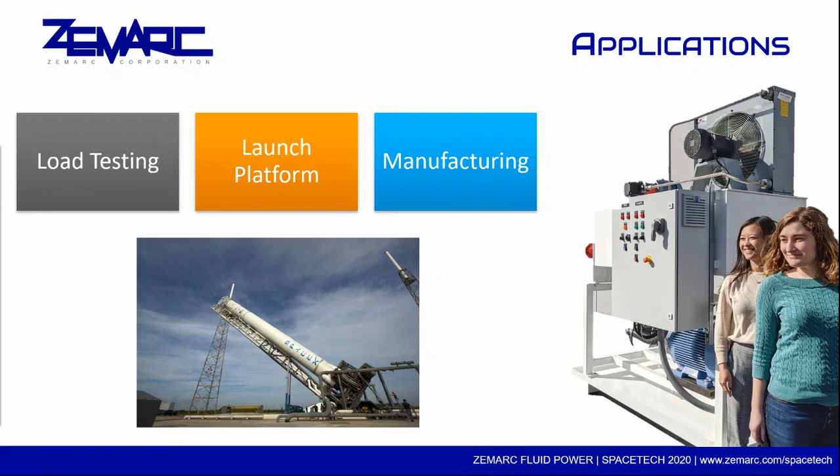Now what I want to do is walk through a list of key considerations that we must address when designing an HPU. HPUs are built based on the requirements of your application, which itself is dependent on the actuation used, be it motors, cylinders, rotary actuators, as well as their usage. How these actuators work in the system will determine the pressure and flow rate required, and also how the system will be cycled.

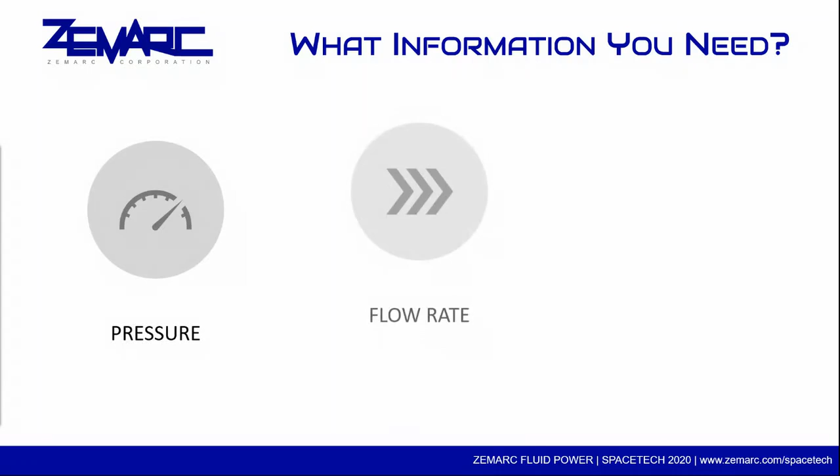First off is the pump. Pumps provide the flow for the system. They are sized based off their displacement, which is the amount of fluid moved by the pump in one revolution. From here, we can calculate the flow rate output of the pump as a function of its displacement and the speed at which it's operated, shown by this equation here, which is just those two values in a conversion factor.

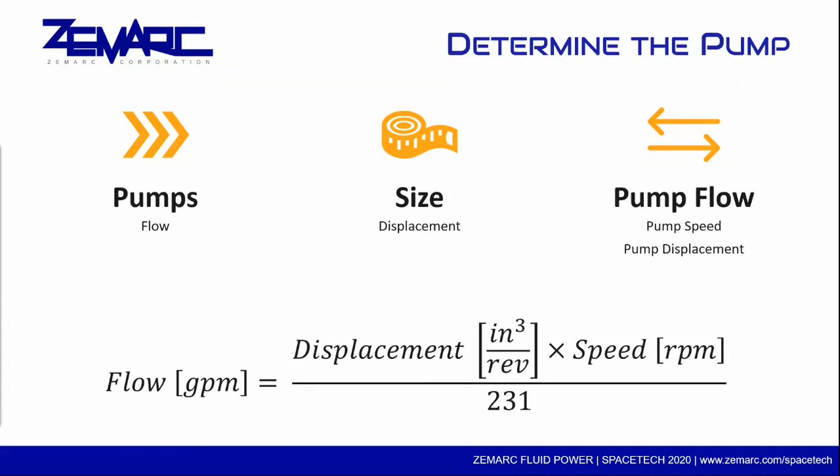Within this general context, there are two types of pumps: fixed displacement and variable displacement pumps. Fixed displacement pumps have a fixed displacement, and the only way to change the flow rate of a fixed displacement pump is by changing its operating speed. Variable displacement pumps, on the other hand, have an adjustable displacement, meaning their flow can be changed independently from their operating speed. While these are fairly basic descriptors, how exactly these types of pumps are integrated into a hydraulic circuit is a bit more involved. It's usually best just to leave that step with us.

So there's a pump. Now we have to move to what drives the pump, and that is the prime mover. The prime mover spins the pump and provides the required torque for the pump to generate pressure. The most common prime movers are electric motors and combustion engines, but engines are a bit more involved to integrate. So for the sake of this short presentation, I'm just going to dip straight into motors.

Motors are selected based off of three things: their power, speed, and voltage slash input power.

Now, the power is determined by the power draw of the pump, which we'll talk about in a little bit. As for speed, 1800 RPM, 1750, 1725 or so is industry standard, but low and high speed motors are also available. For systems where you need variable speed, variable frequency drives (VFDs), as well as things like gearboxes and power takeoffs, can be used between the prime mover and the pump.

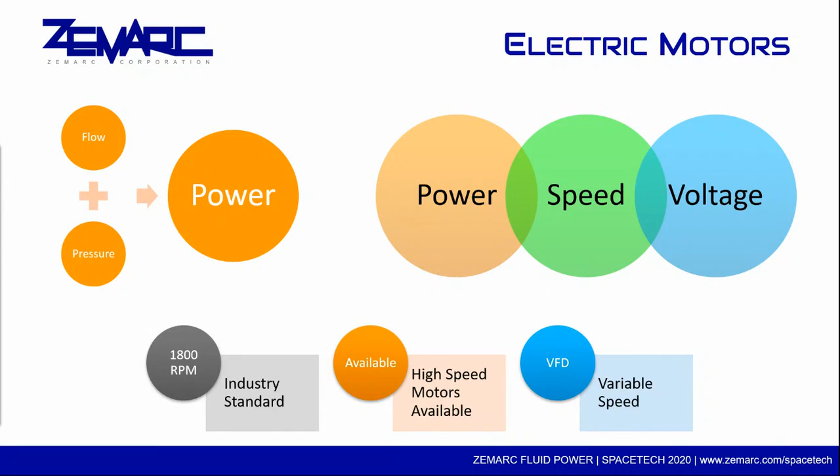Now, going back to the power required by the pump, that determines the minimum power rating of the motor that drives it. This can be determined by this equation here. As you can see, as the pump's output flow rate and/or pressure increase, so does its power draw, and it also takes into consideration this conversion factor.

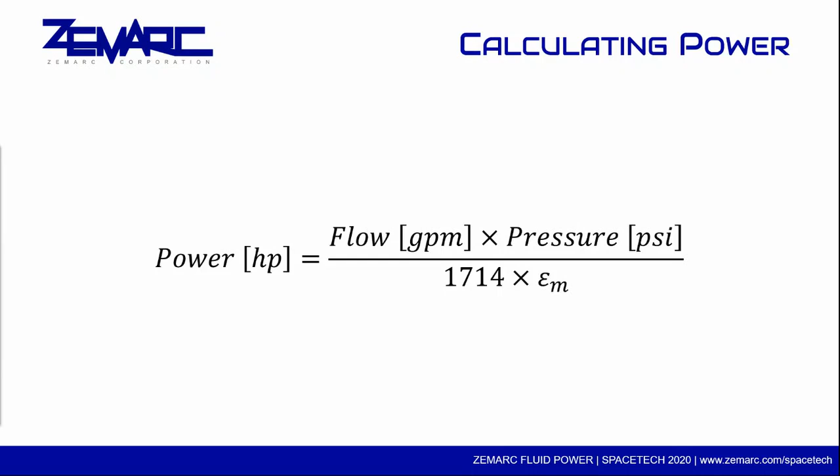Of course, there are mechanical and volumetric efficiencies in this energy conversion. So a pump will usually convert about 75 to 95% of its received shaft power into actual usable fluid power. The rest is rejected as heat. The efficiency of a pump can sometimes be found in the catalog, but almost always there is some kind of power curve chart that will show a more exact power requirement based on a number of operating parameters.

All right, so that is the pump, that is the prime mover, specifically the motor. Now the last main essential component of an HPU is the reservoir. The reservoir houses the hydraulic fluid in the system. It separates air and large contaminants from the oil, and it facilitates thermal transfer to the environment as well.

It rejects heat. Now, in order to fulfill these functions, the volume in gallons of the reservoir should be 3 to 4-ish times the flow rate through the reservoir in gallons per minute. So, for example, a reservoir that sees 10 GPM through it should be sized to 30 or 40 gallons or so.

The bigger the reservoir, the more heat it can dissipate, but of course, the more volume it assumes. And if packaging is an issue, then integrating a heat exchanger into the system reduces the reservoir's heat dissipation demand, and so might also reduce its size.

One thing to note is that large volume adders, these are things like single rod cylinders as well as accumulators, require additional breathing room, so to speak, in the reservoir. So if you have a large cylinder that displaces 5 gallons in its rod volume, you'll need to add that 5 gallons to the maximum capacity of the reservoir.

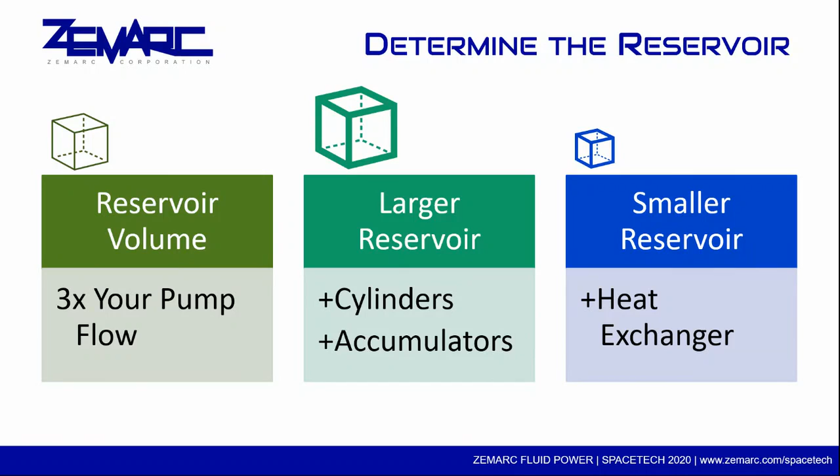So, generally speaking, there are three form factors of reservoirs. First one is vertical. These are named for the orientation of the pump, which is submerged vertically underneath the oil level inside the reservoir. As you can see in this picture, the motor is mounted on the top lid of the reservoir. These systems are compact and usually have a much lower risk of cavitation, and they're packaged very neatly. They're very convenient when we can use them.

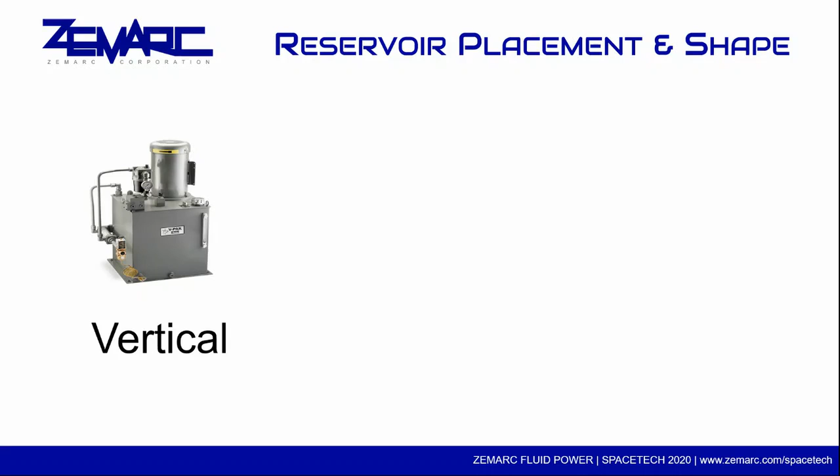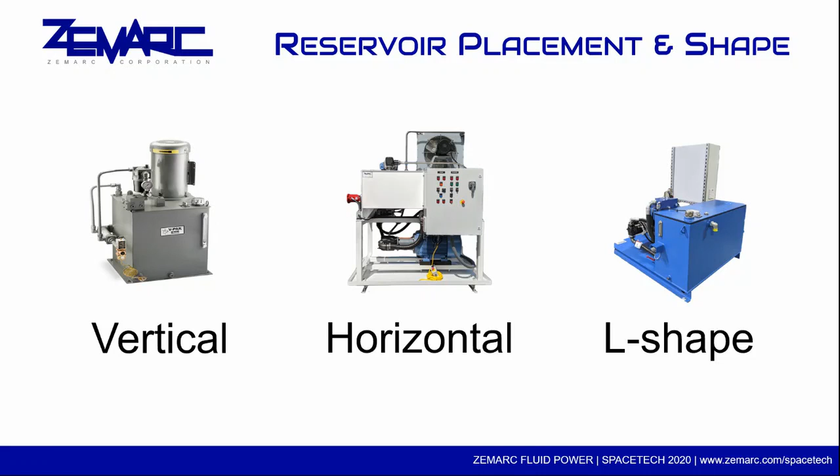All right, so those are the three main components, and there are a few other components we consider essential in an HPU as well. First off is a system relief valve. This discharges the excess flow to limit the system's maximum operating pressure.

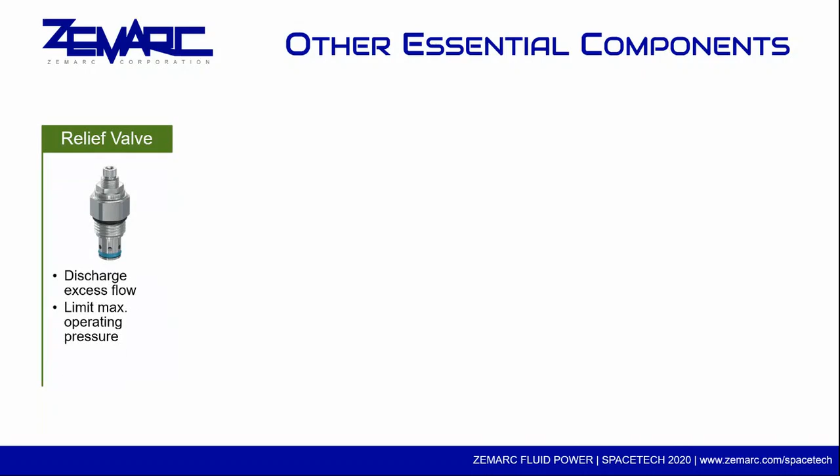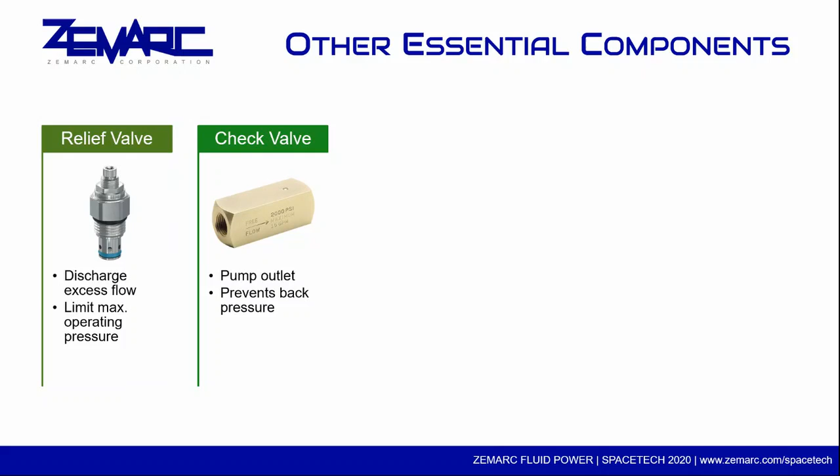Next is a check valve at the pump outlet. While not strictly required, this prevents back pressure on the pump, which can damage the pump and motor, and it's so dirt cheap that there's not much reason not to add it in every system anyway.

Next off is a ball valve. Again, not really crucial, but a ball valve at the inlet to the pump, between the pump and the reservoir, eases maintenance and draining and saves a lot of time in the long run.

Next thing are return filters. These remove contaminants from the working fluid before it returns to the reservoir. This protects your components from damage and excess wear.

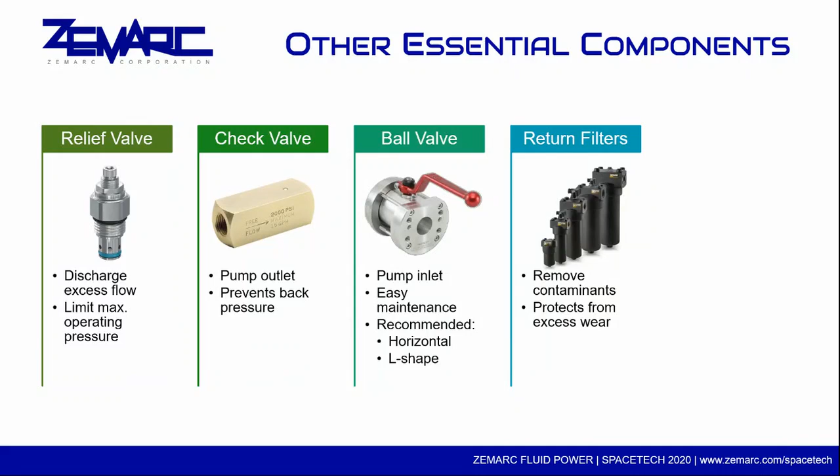I have a bit more about filters, but before that, I want to briefly bring up PLC. We build PLC into most of our higher end HPUs to control the unit. For those who don't know, PLC is a programmable logic controller, a simple input-output microcontroller which can receive inputs from sensors, switches, and buttons, and provide outputs to motors, heaters, valves, or really anything else that needs to be electronically controlled in the system.

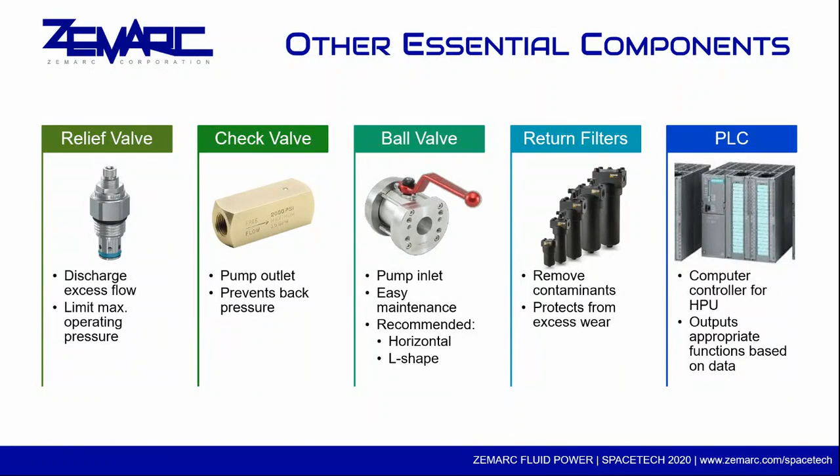Before I move on, I want to discuss a bit more about filtration. One thing to keep in mind is that additional filtration may be needed depending on the environment and application, to increase the life and reliability of the system. This may require additional filters in different locations in the system, like you see in the schematic on the left-hand side here, or it may also require removal of finer sized particles. Sensitive equipment, such as proportional valves, for example, require upstream pressure rated filters with a higher level of filtration.

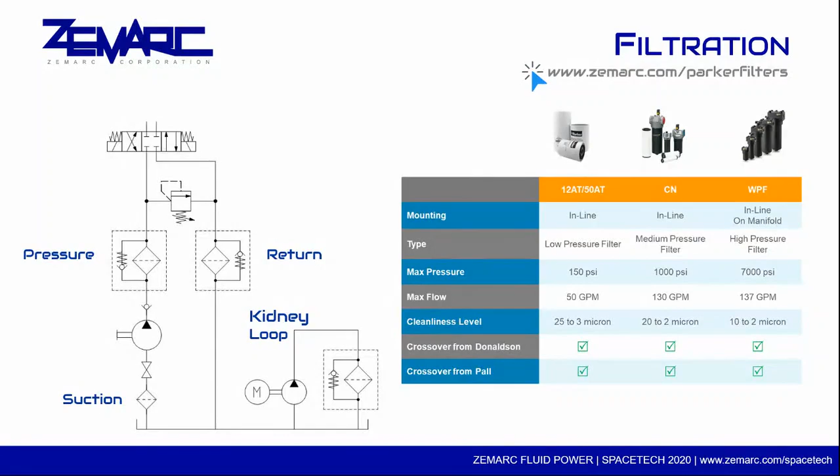So now we've gotten all of the essential stuff, and there are a few accessories you can add to the HPU as well. Depending on the application, these may be deemed necessary too. In general, these are heat exchangers, instrumentation, accumulators, and manifolds.

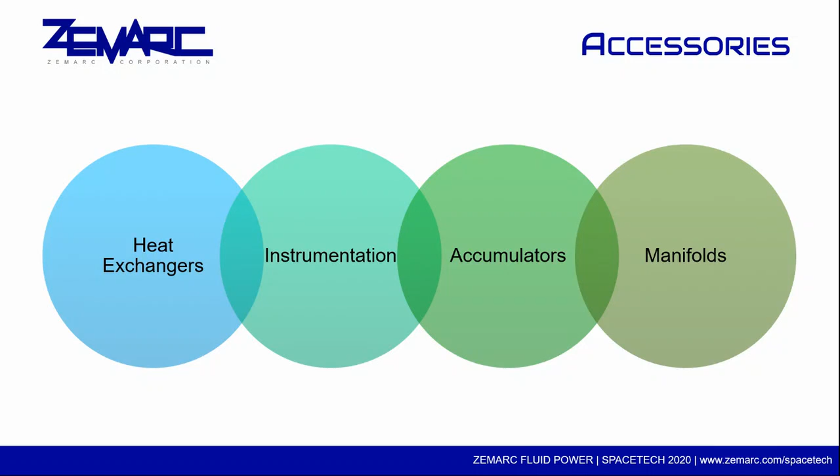Heat exchangers can be installed in systems if there's a concern about fluid temperatures. In general, these are broken down into coolers and heaters. Coolers are often used when the HPU is in a situation where large amounts of heat will be generated, or also when the unit is operated in very warm environments, such as outdoor desert test sites or launch pads at Vandenberg. It can get pretty toasty out here.

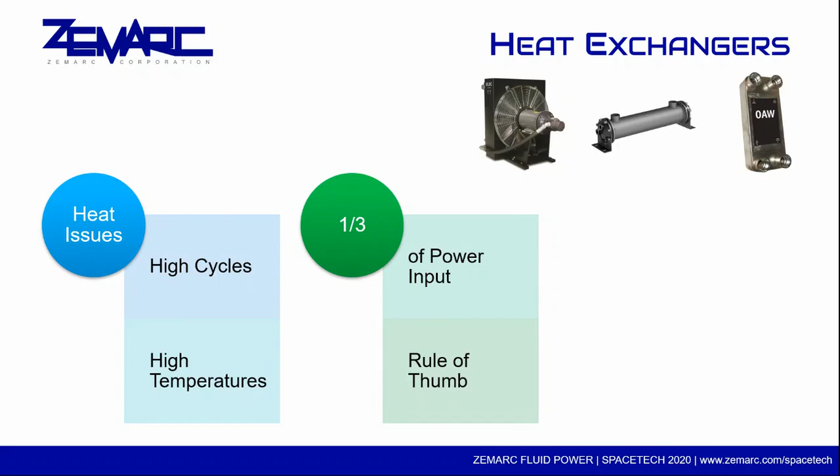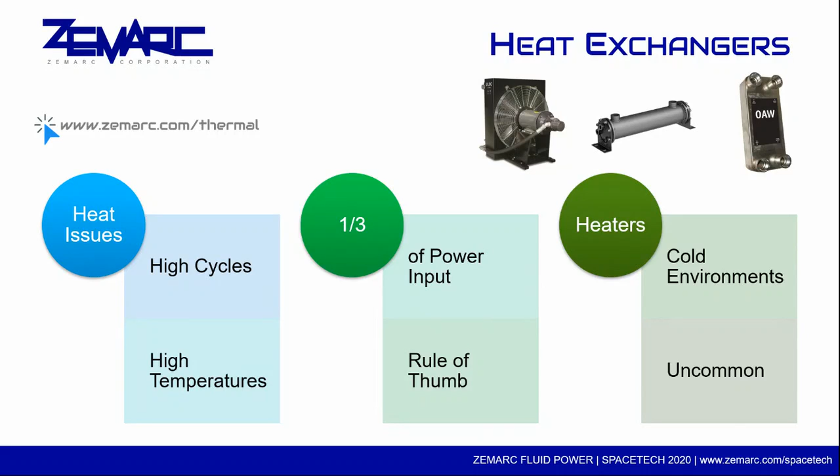A very loose rule of thumb is to size the cooler so that the heat removed is about a third of the power input to the system. But of course, to fully optimize it, every system is different, and we size a heat exchanger to every individual application. Heaters, on the other hand, are less commonly used, and they're placed in HPUs located in cold environments, or when the temperature and viscosity of the working fluid must be closely regulated. If you want to do some extra reading on your own time, you can find out more at zemarc.com/thermal.

The next category of accessories is instrumentation, which is kind of a broad term that encompasses a number of things. First off are sensors and gauges. These give feedback on the HPU for safety and maintenance, and allow for troubleshooting the system, but also allow for monitoring the system's operating parameters. Sometimes an operator will use it as feedback while manually controlling the system.

Next off, switches and transducers. Switches can be used for simple mechanical controls. Transducers, on the other hand, give digital feedback that can allow for more advanced computer control. The most common measurements for any of these are for pressure, temperature, and reservoir oil level, but there are lots of different applications. Flow rate is another one. There are lots of different ways to measure flow rate, and position sensors and linear transducers and so on, but that's for another topic.

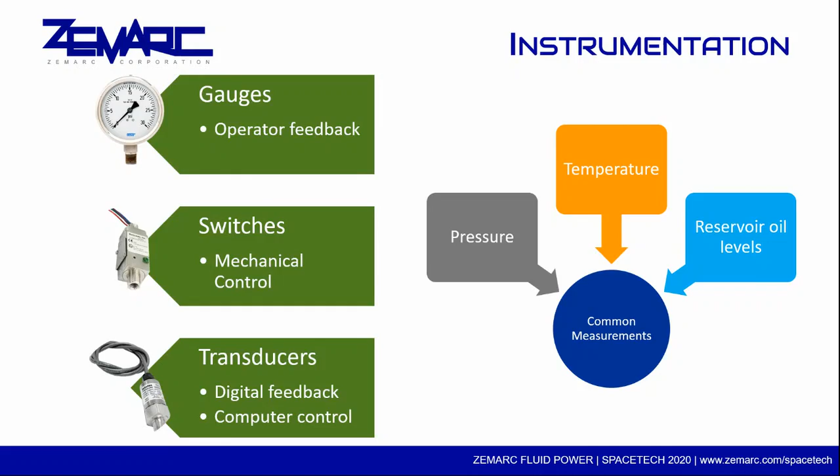Next category of accessories is accumulators. Accumulators can be added into systems for many reasons. Most of the time, for most applications, they absorb shock loads, and they can also provide backup fluid power in case of a momentary power loss. Additionally, an accumulator can reduce the required size of a pump by supplementing fluid power in a low duty cycle application. It gets pretty involved in sizing and specifying an accumulator, so we'll leave it at that for another discussion.

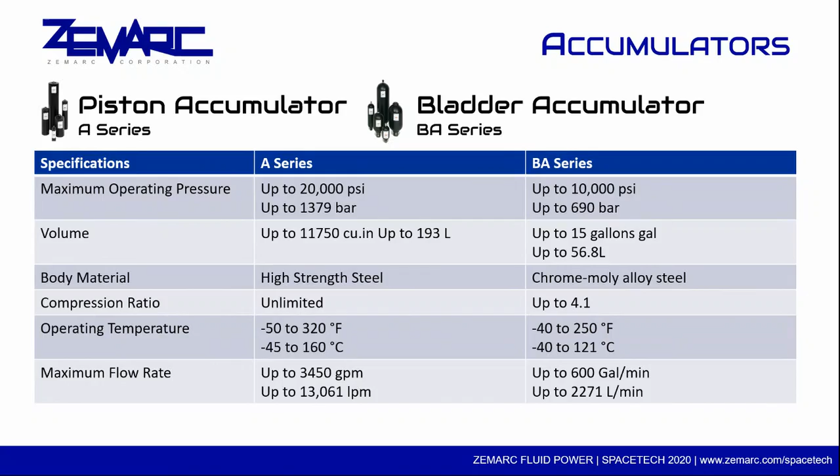The last category of accessories is manifolds. Manifolds are very beneficial to applications with more than one actuator, multiple accessories, or really any kind of complexity in general. They allow for higher flow rates and more compact and organized system setups. One of these manifolds can replace a dozen or more hoses, pipes, and tubes. And if need be, we at Zemarc are available to help with custom manifold solutions as well.

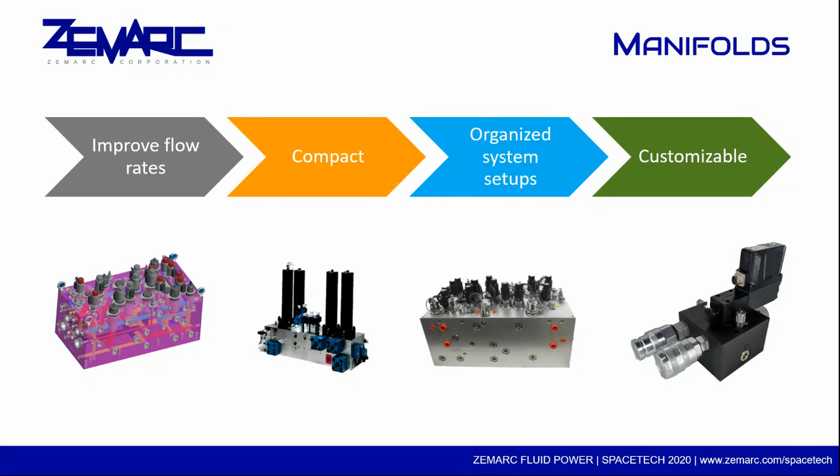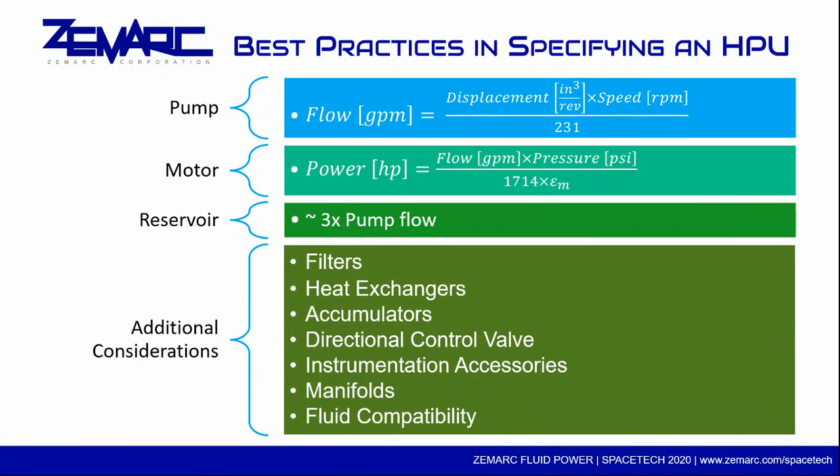To summarize, when specifying a power unit, you want to make sure that you've taken into consideration all the factors you will need to size your pump, motor, and reservoir, as well as a rough idea of what type of accessories you might need for your application. That way, when you approach a Zemarc engineer like myself or Ian here, you will have a better idea of what you need to discuss in order to create the most efficient and cost-effective solution for your project.

Now we're just going to switch a few things around here. There we are. All right.

We've explained the generalized process through which we build a custom HPU to our customers' specifications and requirements. We can arrange these components to form different types of circuits that perform specialty functions or improve the efficiency of the system. Let me just make sure that...

Let's see. Oh, my bad. There we go. Much better.

For low flow conventional applications, however, Parker also sells off the shelf units. These are their D-Pak, H-Pak, and V-Paks, like you see here, as well as their Oildyne compact units for more cost effective, small single actuator systems.

So these power units, they're not actually quite off the shelf in a literal sense, but rather they are built to order based on a small list of standard primary components as well as optional accessories.

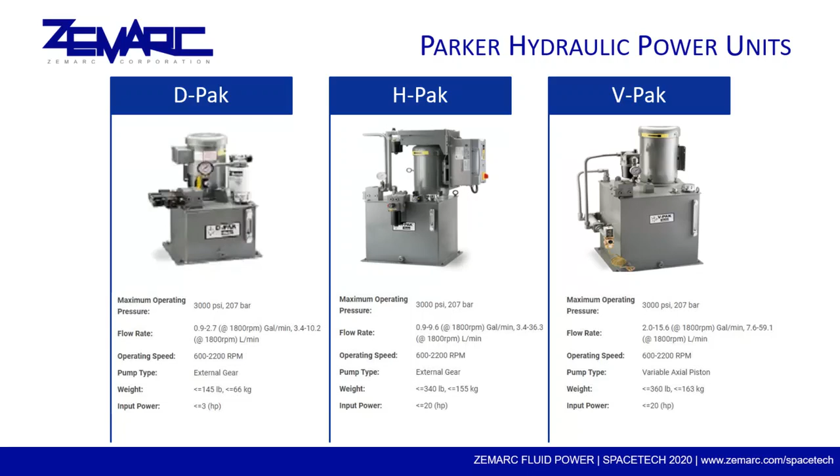So when our customers do not have a specialized application or specific requirements, or they don't require very high flow rates, Parker's HPUs are packaged neatly. They require much, much less time to design and assemble, which means they arrive at your doorstep a lot faster. And they're also sometimes a lot more cost effective.

Give me a second, I'm just having some technical issues with this here. There we go. All right.

So Parker's online configurator also allows customers like yourselves to easily specify your own power unit. So let's actually run through the process of specifying a D-Pak as an example.

First off, we'll start with the three basics, which is the pump, the motor, and the reservoir. For this, we'll need to know a required flow output and pressure rating from which we can determine our motor rating and reservoir size. Let's say we require a flow output of 1.5 GPM at 1500 PSI as an example. We would then reference page 30 of this online catalog to determine which pump and motor are sufficient for this application.

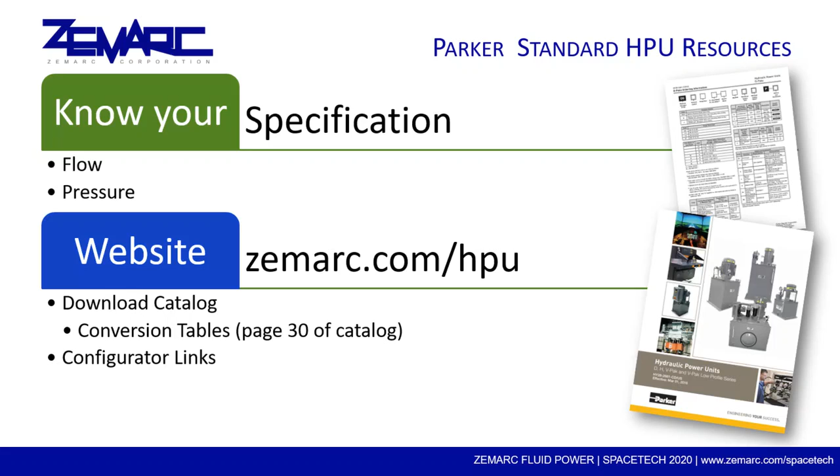You can find the catalog through our website at zemarc.com/hpu, and there's also a link to the configurator as well. But for the sake of this presentation, I've taken the liberty of copying and pasting that exact chart right here in the presentation.

So we can see, according to this chart, that in order to meet our 1.5 GPM requirement, we will need the 1.8 GPM pump right here to meet our minimum flow requirement. And if we follow that row to the right to the next step above 1500 PSI, we'll see that we need the 2 horsepower motor to provide the minimum power requirement for the pump.

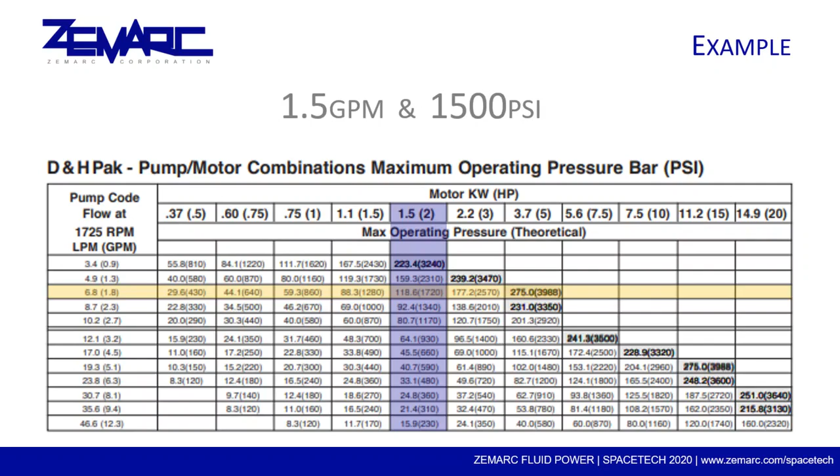So now I'm going to switch gears here and actually show you the configurator on Parker's website. Let's see, and there we are. Hopefully you guys can all see that all right.

So this is the configurator. If I am just on Parker's website for the D-Pak, this right here in the big yellow button is the configurator. And here it is right here.

So first off, let's start from the top down. Reservoir: the D-Pak makes it easy because there's only a 5-gallon reservoir available, so we'll skip that. Pressure control, let's say we only need a relief valve. Pump flow, there is that 1.8 GPM pump that we mentioned.

That's calculated at the 1725 RPM motor, I believe it is, and for the electric motor, 1725. Then there is that 2 horsepower motor. If you want, you can also order it without a motor and supply your own, but most of our customers purchase HPUs with the motor included.

Let's say we only need a standard manifold here, and I'm going to stop it just a quick second. If we take a look up at the top here, you can see that as we are filling in all of these options and categories, the configurator is slowly building up this model code. So by the end of this, we will have a finished model code.